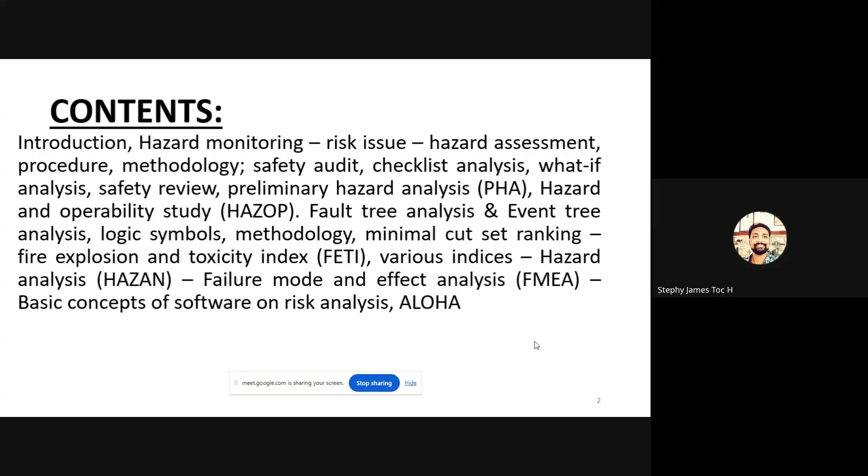Before going in detail, what is the general idea? What is hazard? As you all know, according to International Labour Organization statistics, around 3 lakh 40,000 people are affected by accidents every year in this world.

What are the various types of industries causing accidents, and what are the various other types of accidents which cause fatality to people? Surprisingly, industrial accidents are not killing the most people. It is actually road accidents. If you take the statistics in India, around 1.5 lakh people are dying in India every year on average. The second place is United States, around 36,000 to 40,000 people dying every year in road accidents. If we come to industrial accidents, according to ILO, road accidents are higher and industrial accidents are lesser.

So anyhow, what is the reason for these accidents, what is the cause, or how can we reduce accidents? We have to understand terminologies like hazard, risk, unsafe act, unsafe condition, dangerous occurrence, and so on. What do you mean by hazard? Hazard is generally considered as something that has a potential to cause harm. That may be unsafe acts, unsafe conditions, a situation, or a combination of these things that has a potential to cause harm is called hazard. So this is nothing but something having the property or potential to cause damage to people, property, or environment.

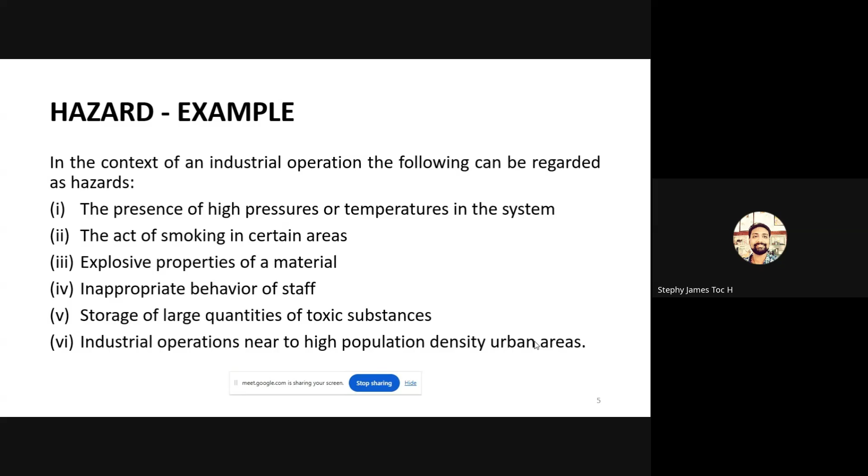So simply, examples of hazard may be the presence of high pressure or temperature in the system, lack of lights or glare, act of smoking, explosive properties of the material, or human error - that is overconfidence, inappropriate behavior of staff, storage of large quantities of toxic substances, rotating machineries without guarding, industrial operations near high population density urban areas.

So we can have hazard classifications like physical hazard. What do you mean by physical hazard? Anybody? Let it be more interactive - I can ask some questions and we can interact, I can get your knowledge also. Physical hazard is nothing but pressure, light, noise, vibration, extreme temperature, and so on. Can anybody say an example of sources which produce high noise? Anybody in industry - what are the equipments which produce high noises in industry, or what are the places where high noise will be there in industry? Anybody?

Anybody can answer? Otherwise it will be only a one-way communication. We try to break the limitations of online sessions by interacting with everybody. No problem if anything goes wrong. Can anybody respond?

Srijit PS, can you respond? Good evening, sir. During the working of fabrication units, yeah, of course, like yes, correct.

Cutting operations, knurling or grinding, extreme noise will be there. During fabrication all these activities are done. Yes, correct only, sir. Anybody else?

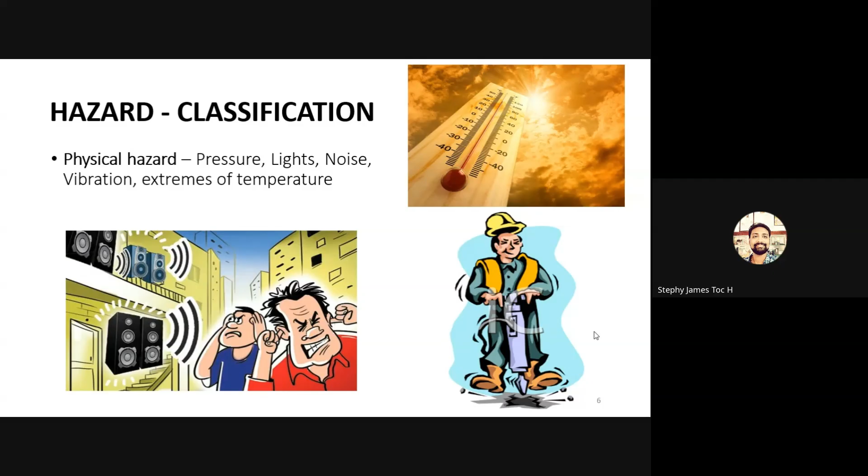This is physical hazard. And chemical hazard - this is very important. Anybody from chemical engineering background can say the major hazard of an industry comes under chemical.

In industrial hazard, the major hazard is fire, explosion, and toxic gas release. If you take an industrial perspective, this is actually a manufacturing and industrial application ATAL FDP. So mainly, if you consider an industry like a refinery or any manufacturing industry, the major hazard is fire, explosion, and toxic gas release.

These come under chemical hazard. So can anybody say what is the major area where fire hazard probability is there? Anybody? Nitin John, can you tell me?

Sorry, can you please repeat the question? Where are the probability of fire in an industry - fire hazard - in which industry has fire hazard? Some petrochemical industry can have.

Absolutely, you are right - refineries. Why does refinery have more hazard? Can you explain? Because refinery - petroleum products are most likely to have fire.

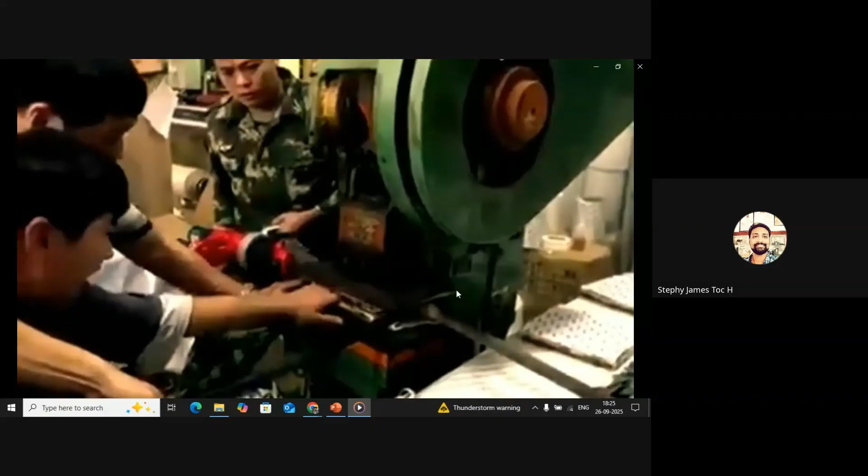This is actually a mechanical hazard. And also you can see here, this is a rotating machine. A lady here, you can see a rotating machine without a guarding. See, this is what happens. Immediately somebody saw that and switched it off. You see this is actually very dangerous.

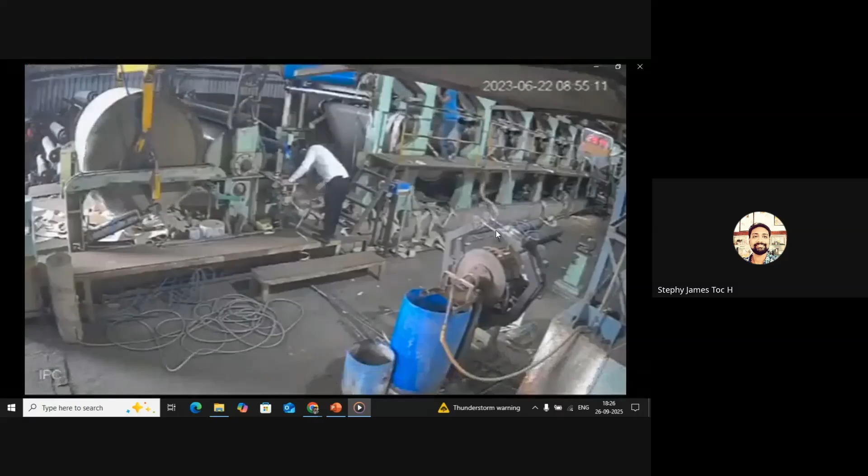That white color shirt boy is just closely watching. He's just putting some paper or something into the roller, very unsafely. And he goes inside, see, he just goes inside the roller. He got crushed into the roller. So these are all mechanical hazards.

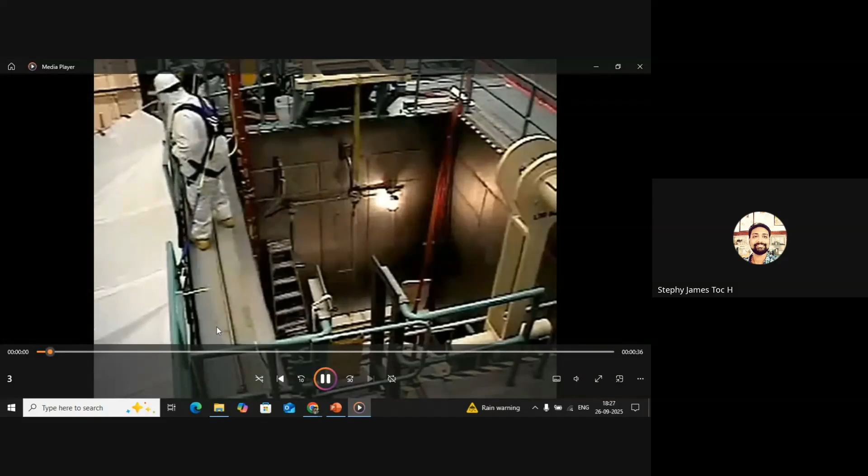And you see this video, he is wearing the harness here. This is the harness, and he's hooked the harness here. If suppose he's slipping from this height, because he has hooked the harness here, what will happen? Suppose he is slipping from this platform. Yeah, he is slipping, yes, he slipped. Now, because of this hook, he has hooked this harness to the lifeline in this area, and that is why he survived. These are all mechanical hazards.

I'll show some more videos in between. So this is about the mechanical hazard: scraping, impacts, contact, entanglement, falling, crushing, all these things come under mechanical hazard. Next, electrical hazard. Somebody want to see the electrical hazard?

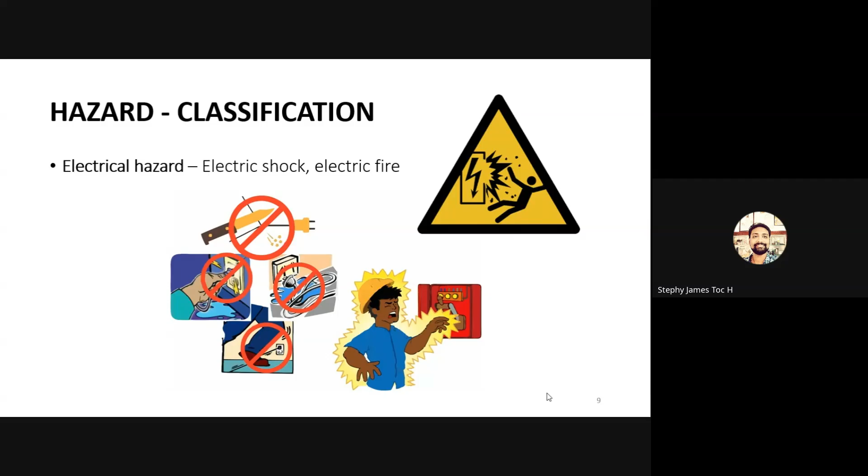Biological hazard, everybody knows about COVID, virus, bacteria, dengue fever, effluent water problems, food handling, and personal hygiene.

Ergonomic hazard - this is actually because of improperly designed tools, poor planned work area layout. So if you are doing repeated motion, sometimes you will be having neck pain, leg pain, body pain, back pain, hand arm vibration, musculoskeletal disorder, MSD. Mechanical engineers might be knowing about it. MSD, hand arm vibration, everything comes under MSD, or maybe we can say CTD, cumulative trauma disorder. All these are ergonomic disorders.

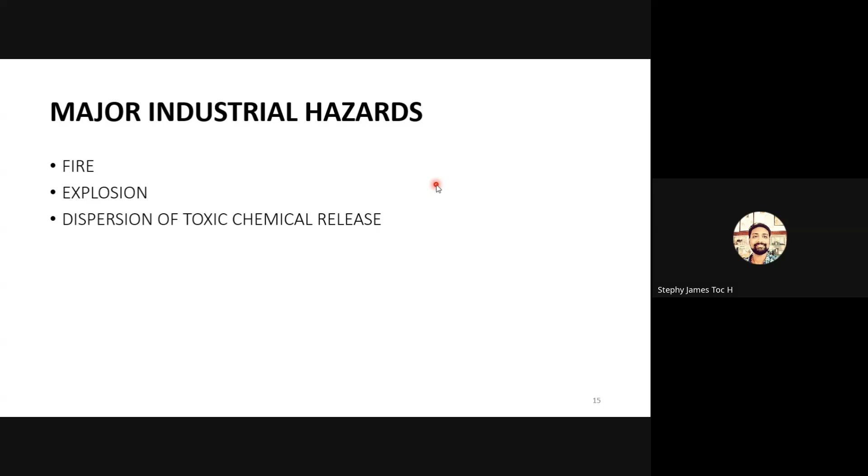So major industrial hazards, as I mentioned, fire, explosion, and toxic leak. These are the major industrial hazards. So fire is the most frequent of hazards, however the consequences are generally less.

Fire hazards - fire can produce toxic fumes also. Recently there was an incident in Kuwait, a building fire, and if you see the casualty of the people, there is no burn at all. Then how did the people die? Because of the smoke - before it comes to CO2, it will produce CO, carbon monoxide. They inhale carbon monoxide, carbon monoxide is also very dangerous. So fire can produce toxic fumes like acrolein, carbon monoxide, and cyanates during a building fire, during building damage. This carbon monoxide, acrolein, and other cyanates it will produce, and people inhale that, and thereby they die, not always because of the heat radiation.

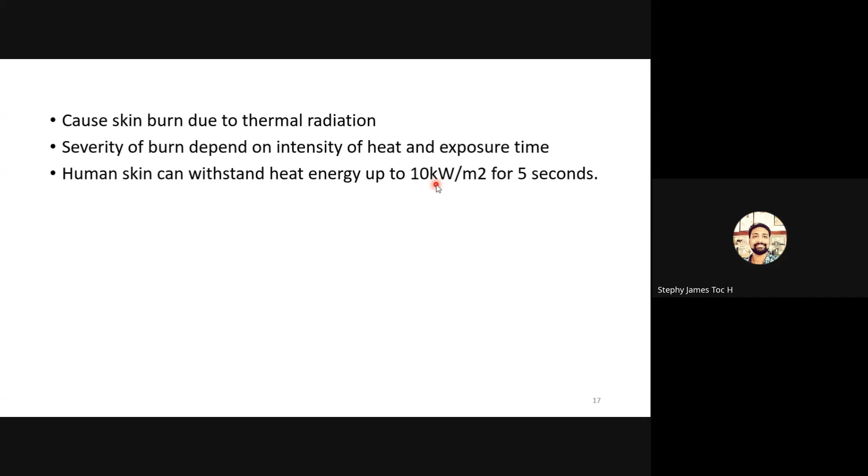Do you understand? So that is one thing. It can also cause skin burn due to thermal radiation, that is another thing. Severity of burn depends upon intensity of heat and exposure time. Human skin can withstand heat up to 10 kilowatt per meter square for 5 seconds. More than that, it will damage the epidermis. The skin has various layers - first degree burn, second degree burn, all these things will be there. So if there is more exposure, 50 kilowatt per meter square and all, it can cause third degree burn, second degree burn, like that.

pool fire - actually from a storage tank it comes out, maybe diesel or petrol, it comes out, and it will be covered in the dike. If suppose there is a storage tank, there will be a dike. Dike is nothing but what you can say, a bund.

Dike is provided to protect the industry. If there is a leakage from the storage tank, it should not spread out to various other layouts or facilities. It should be contained in the dike. A dike is just like a barricade made of concrete structure, so the leak will not spread out and there will be no problems with other facilities. That is called pool fire.

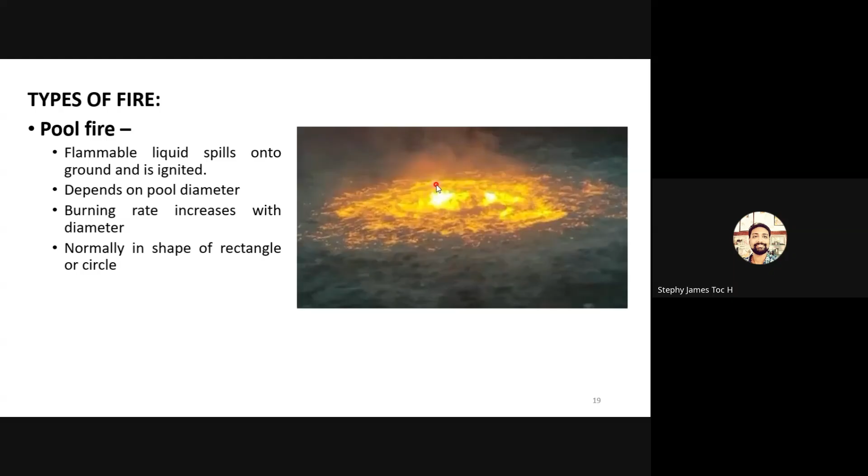And this is BLEVE. Can anybody explain what is BLEVE? Boiling liquid expanding vapor explosion. You might have seen an LPG bottle. What is inside the LPG bottle? What chemical is there inside the LPG bottle?

Anjana? Darshana, Mary. Anybody?

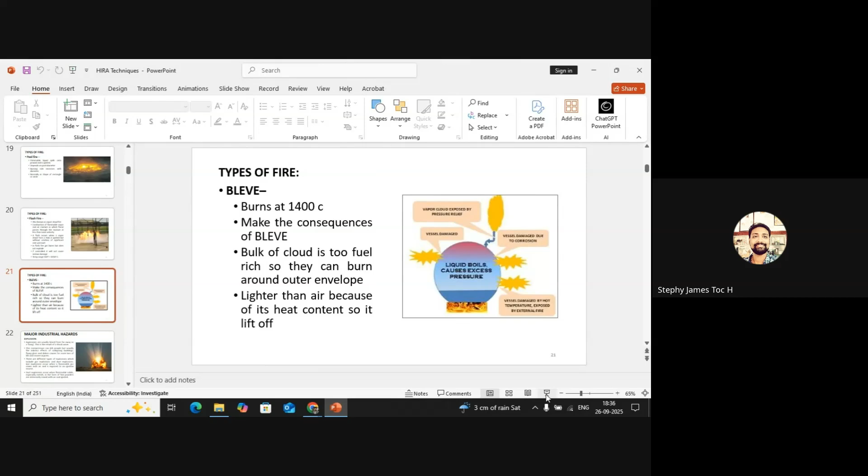So what is the chemical inside the LPG bottle? It is the combination of propane and butane.

Originally, this LPG does not have any odor at all, no pungent smell. Then how does it smell? If from your household domestic application LPG is leaking, you get a smell, a foul smell. Actually, there is a chemical added to it, called ethyl mercaptan. This chemical is added to detect or identify that LPG has been leaked. By adding this chemical, people can easily understand that if it leaks, a foul smell detects it: oh, LPG.

This BLEVE happens, as you all know, LPG is actually liquefied petroleum gas, under pressure it is pressurized and liquefied. If it leaks and catches fire from the nozzle of the regulator, do you believe the fire will go inside the cylinder and it will explode? It is not happening like that. Because of the fire, outside elements like paper, wood or anything like that get fire. So the outside temperature of the LPG cylinder increases, and the liquid inside the LPG starts to boil over or something like that. It becomes gaseous, converting from liquid to gas, and the pressure increases inside the tank, and the tank is designed for a certain pressure.

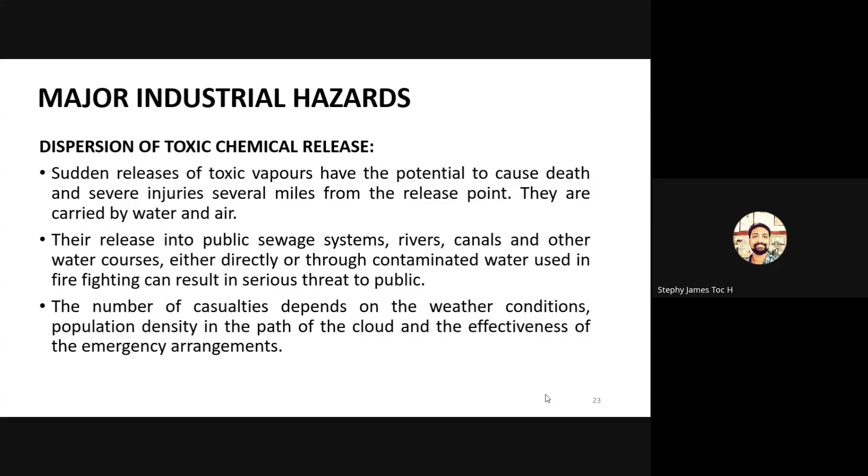So dispersion, what is dispersion? Dispersion is nothing but a sudden release of toxic vapors. They have a potential to cause death and severe injuries. Methyl isocyanate, carbon monoxide, hydrogen sulfide, sulfur dioxide, any types of cyanides, chlorine, ammonia - all these things can leak and people can inhale it.

So the dispersion of toxic gases, this is what I said, the Bhopal tragedy, Union Carbide Limited. Around 42 tons of methyl isocyanate was leaked on that day, and so many people were killed in that disaster. This is considered to be one of the world's largest disasters after Chernobyl.

This accident happened in 1984, and around 42 tons of MIC, 30 metric tons of methyl isocyanate, escaped from the tank to the atmosphere in 45 to 60 minutes.

The MIC tanks were large, refilled beyond recommended levels, with poor maintenance and failure of several safety systems. Actually, there was cost cutting - cost cutting done on safety. There was no scrubber system, flare system, bypass tank system, or refrigeration system. There were no qualified and educated trained people. So they cut the cost for everything. And what happened finally? It was an American company.

They made poor decisions, and Indian life has to be sacrificed for their carelessness and lack of safety. Our people suffered. So many people were killed in that disaster.

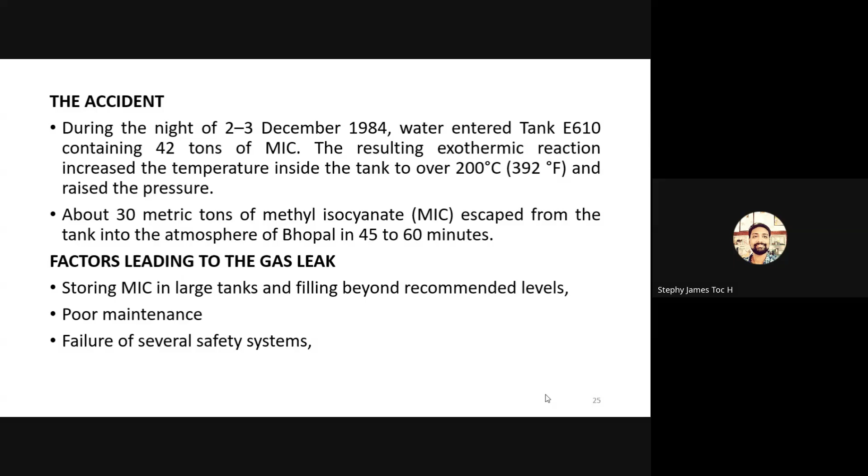So what is risk, nothing more? What do you mean by risk? Risk is actually a combination of probability of occurrence and its severity - probability P and severity of consequence, or probability into severity. Can anybody say what probability means?

Probability is nothing but how frequently an accident is happening - that is called probability. And what is severity? Severity is nothing but what is the consequence of that. So the multiplication of these two things, probability and severity, gives the risk.

And what is the consequence? A small cut, small injury, then first degree burn, second degree burn, one person died, 2% died, 10% died, 100 people died. So you can see how the consequence increases.

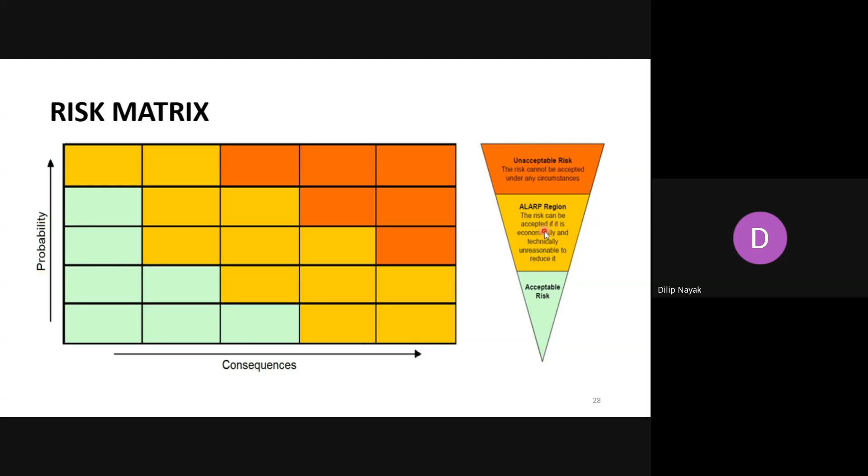The ALARP region is nothing but as low as reasonably practicable, that is the tolerable region. So high risk means intolerable, then tolerable, then acceptable. These are the three risk ranks.

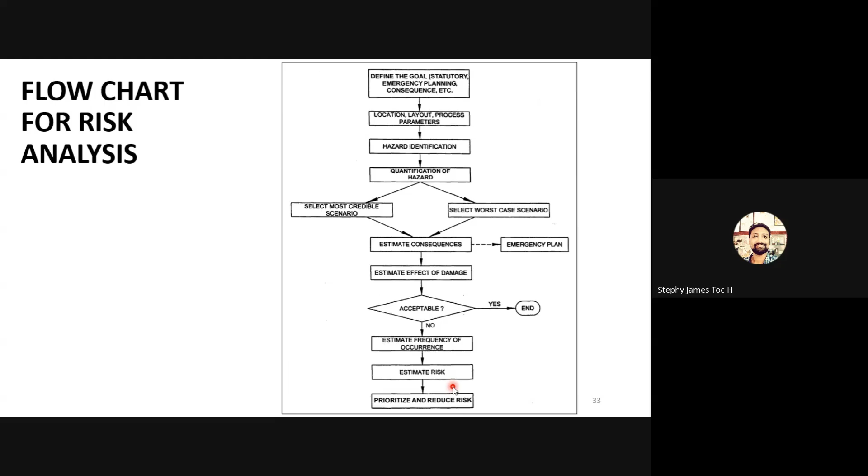Now this is the flowchart for risk analysis. Here the main thing we do is define the goal, then location, layout and all that, hazard identification, quantification of hazard, select the most credible scenario, select the worst case scenario, estimate the consequence, estimate the effect of damage, then decide whether it is acceptable or not. If it is not acceptable, then estimate the frequency of occurrence, estimate the risk, and prioritize and reduce the risk.

We have to prioritize the risk. There are a lot of incidents happening in industry, and many hazard identification tools have prioritization techniques too. If you take Chandrayaan 3 rockets and space missions, there are 10,000 or more components. So which component's failure collapses the entire mission? That component has to be given the highest priority, and redundancy should be there for it. If that component fails, another component has to take over - so 3 or 4 times redundancy is required, and high reliability is also required.

So the goal of carrying out risk analysis is required as part of statutory requirements, emergency planning, etc. And the quantification of hazards uses indices - methods for hazard identification and quantification.

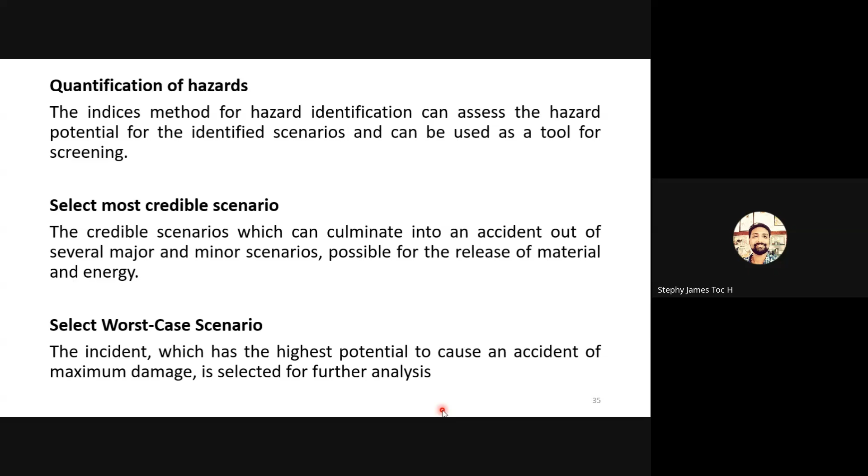Imagine your college classroom, I'll ask a question. Imagine a college classroom. Darshana Mari, I called you twice, are you there? Darshana Mari... Darshana Mari is not there, so let's go to Dilip Naik. Dilip Naik? Yes sir. Are you faculty? Yes sir. Sir, in your college classroom, somebody asks you to assess the fire risk. If the fire risk is high - yes sir - imagine in your classroom the fire risk is high. How can we reduce the fire risk to low or medium?

Sir, we have to keep fire extinguishers. Yes, absolutely, you are right. Fire alarm, fire extinguisher system, we can provide, sprinkler system we can provide, fire hydrant we can provide, fire exits, fire doors has to be provided. So do you have all this system in your classroom? Yes, sir. Then your fire risk is very less. Everything is provided, your college is taking care of you very well.

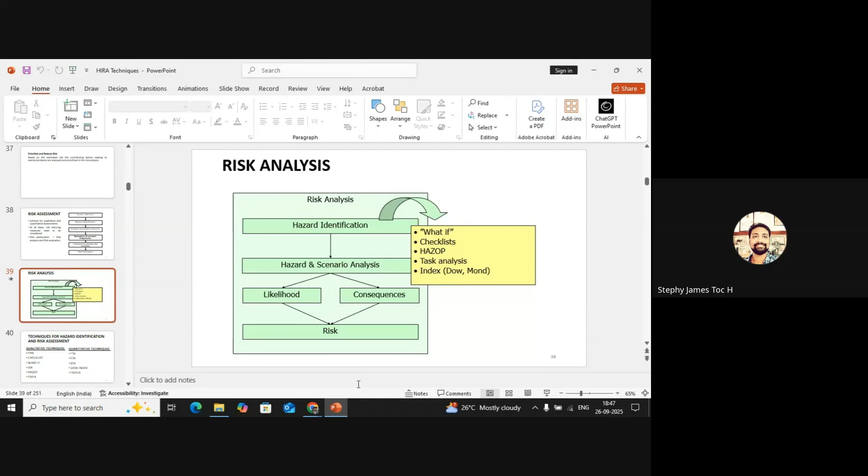But in many institutions or hospitals, there is no sufficient mechanism for reducing the fire risk or hazard control. So there are various techniques used for hazard identification: what-if analysis, checklist, HAZOP, task analysis, Dow index. These are the various techniques.

Generally, we classify hazard identification and risk assessment techniques into two categories: one is qualitative technique, one is quantitative technique. Another one is semi-quantitative technique, that is layer of protection analysis, which is actually a semi-quantitative technique.

So qualitative technique means, as I can simply explain, if I ask somebody how is the rain, you can give a qualitative or a quantitative answer.

Prilly VF. Prilly VF not available. 71 people are here, but most of the people are not available. Gopika NE. Okay, so the effectiveness of the FDP may not be that much good, I think, because they just opened it and went somewhere else. Jishnu K. Jito George. Okay, anyhow, no need to ask questions.

So if somebody asks you a question like this, how is the rain, the qualitative answer is: the rain is very good, heavy rain, low rain, medium rain, or there is no sufficient rain, very less rain, poor rain. These are all qualitative answers.

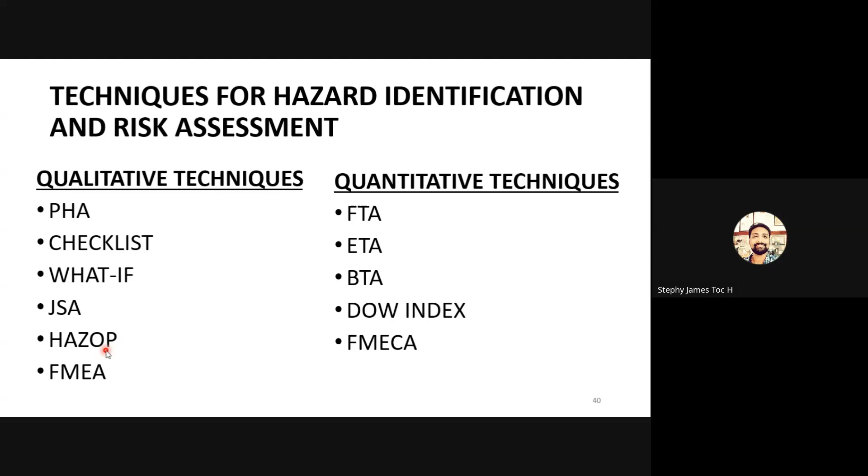So that is about RPN, risk priority number. And PHA - these are the qualitative techniques. PHA means preliminary hazard analysis, checklist, JSA, HAZOP means hazard and operability study, and FMEA, failure mode and effects analysis. So a scenario is a sequence of events which causes hazard to result in accident.

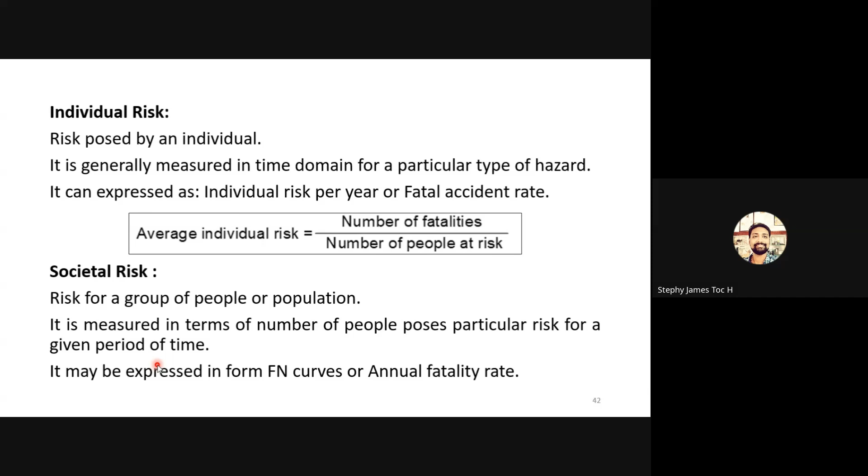Risk analysis is a quantitative estimate of risk using engineering evaluation. It involves estimation of hazard and probability of occurrence. This is the formula used for finding the individual risk: number of fatality divided by number of people at risk. So you can find the individual risk, and it can be measured using a technique called risk contour. Societal risk can be mapped using a graph called the FN curve.

And this, as I already mentioned, is ALARP - as low as reasonably practicable, which describes the level to which we expect to see workplace risk control. As I mentioned in the ALARP triangle, you can see 3 regions: the top region is high risk, that is intolerable, then tolerable, then acceptable. These are the 3 regions. You can calculate the risk, and if it comes under the intolerable or unacceptable region, what do you have to do? We have to add more safety systems to this.

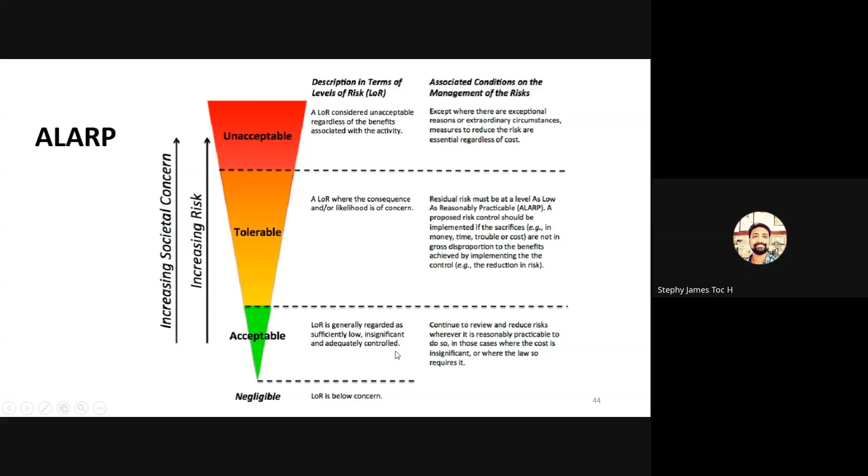Dilip Naik. Can somebody mute Dilip Naik.

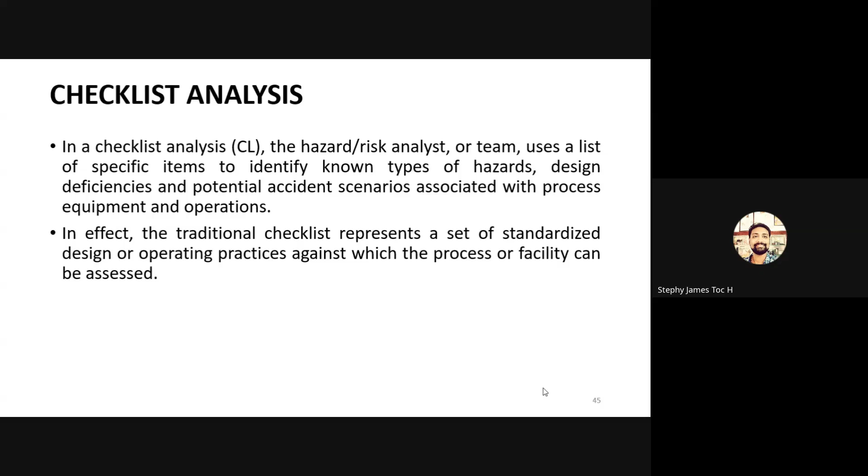The first method is the checklist method used for doing safety inspection. The checklist comes from IS 14489, which is the code of practice for safety audit. The checklist will have around 400-500 questions, such as whether safety systems and checkpoints exist, whether there's a safety policy, sufficient fire extinguishers, sufficient sprinkler systems, electrical records, licenses, and so on. Lots of questionnaires will be there. This is the checklist method of conducting safety audit.

Necessary additional columns can be added based on requirement. Traditional checklists generate a list of responses to standard checklist questions, and more general checklists may be produced. Various types of checklists exist - for electrical safety audit we prepare a separate checklist, and similarly for mechanical, chemical, or environmental audits like ETP, all different types of checklists.

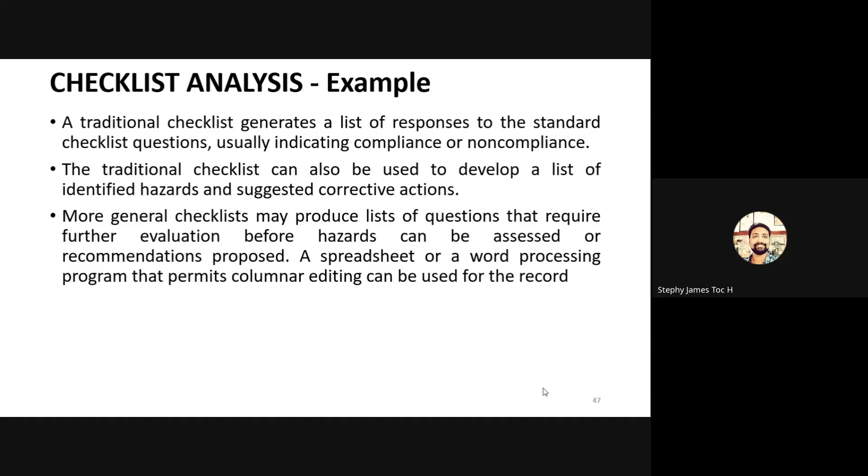The next technique is what-if analysis. This is a very simple technique - we just ask questions and get answers. For example: if suppose there is a fire accident, what if? If suppose valve A is open instead of valve B, what if? If suppose there's a substitution of wrong material into the reactor, what if? We keep asking what if and find out the answer.

So we propose a what-if question and identify the scenario, consequences, and recommendations. This is the table we use - let me explain with an example of what-if analysis.

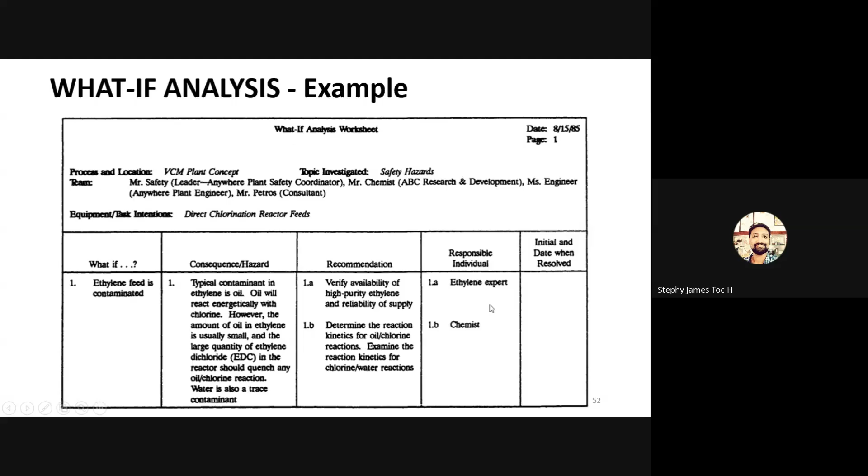Ethylene feed is contaminated - what if? What is the consequence? What is the recommendation? Who is responsible? This is a worksheet for what-if analysis for a particular plant.

Another example: Cl2 feed, chlorine feed is contaminated. What if? What is the cause? What is the consequence? What is the recommendation for that?

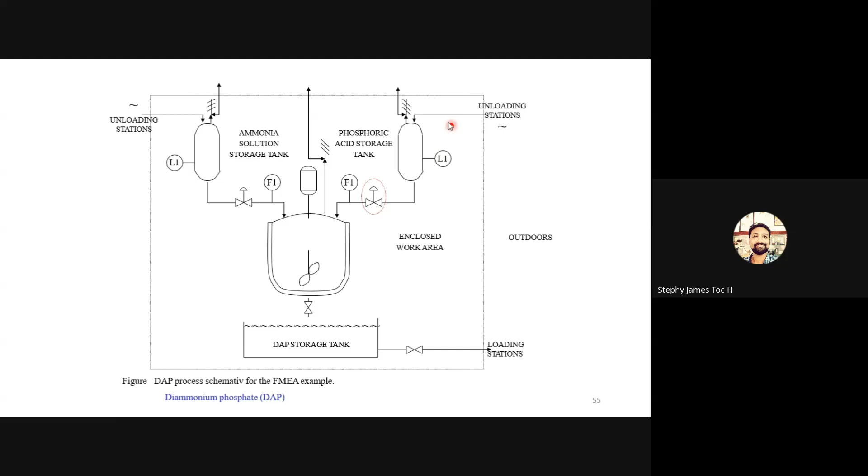Here you can apply what-if analysis. The what-if questions are: what if the wrong product is delivered instead of H3PO4? If suppose some other material is fed to the reactor instead of H3PO4, what if? What if H3PO4 is at the wrong concentration? The stoichiometric concentration has to be maintained, otherwise instead of DAP, some other product or out-of-specification product will result. What if H3PO4 is contaminated?

What if valve B is closed? What if valve C is closed? What if vessel agitation stops? Like this, we keep asking questions and finding answers. This is a simple way of doing what-if analysis.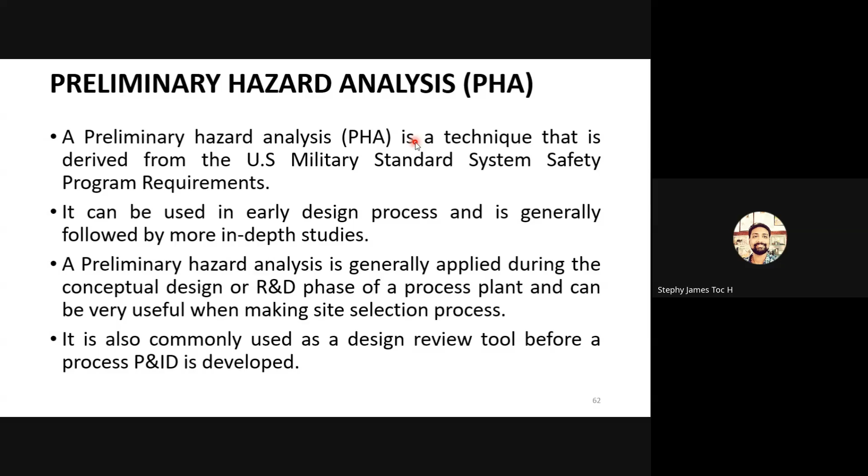Safety review is not much important, so I'm skipping this. The next one is preliminary hazard analysis, which is a little more important. Preliminary hazard analysis was actually invented by the US military to identify various hazards in the early design process or during the P&ID - meaning the pipeline instrumentation diagram or process instrumentation diagram.

During the design phase itself, we can find out various problems like facility characteristics, plant equipment, facility layout, operating environments, operational activities, and all. Now let's move to this.

This is actually PHA. The hazard can be classified into category 1, 2, 3, 4. Hazard category 1 means negligible, 2 means marginal, 3 means critical, 4 means catastrophic. This is actually documenting the risk.

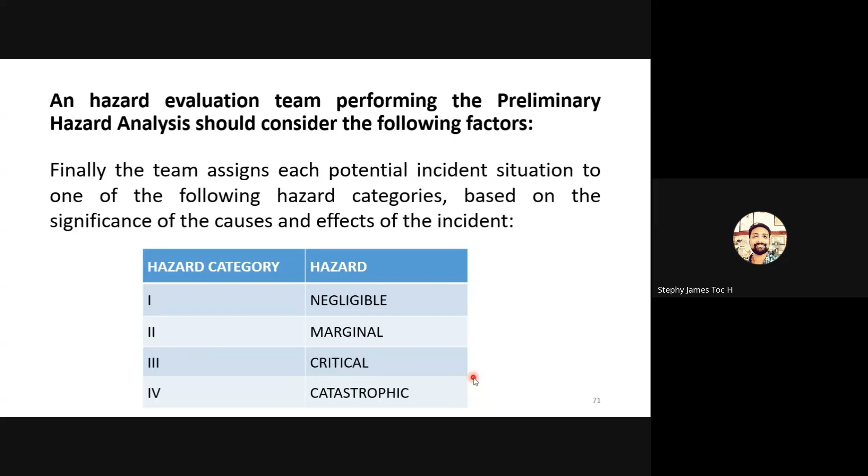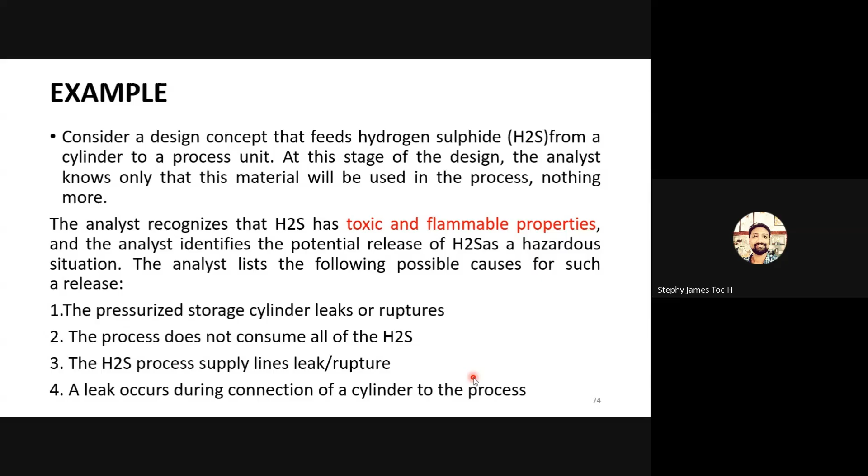And the corrective action - this is a simple example of PHA. Here, what is actually happening? The analysts recognize that H2S has toxic and flammable properties, and the analysts identify the potential release of H2S as a hazardous situation. The analyst lists the following possible causes for such release.

Consider a process that stores alternative less toxic material that can generate H2S as needed. Hydrogen sulfide, as you know, if it leaks, what will happen? That is the thing we have. So PHA deals with a large inventory of highly toxic hazardous material.

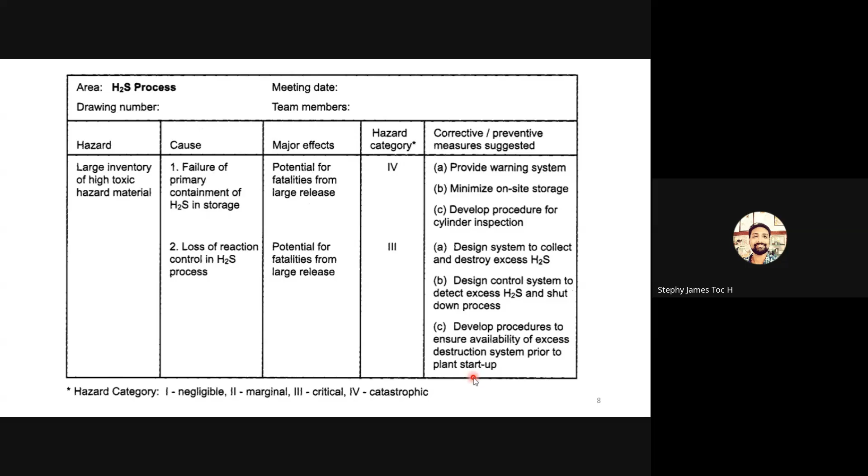What is the cause? Failure of primary containment. If the failure of primary containment happens, then there's a potential for fatalities from large release - that hazard category is 4. And loss of reaction control in the H2S process, the potential for fatalities from large release, that is hazard category 3.

The next important technique is - sometimes I am skipping, because this presentation has 200 more slides. This is meant for a 3-hour presentation, but your time is only 1.5 hours, so some slides I will skip. Only the important things I will explain.

So HAZOP is actually a very important technique. Any chemical engineers here might be knowing about HAZOP. Is HAZOP applicable to the construction industry? Can we apply HAZOP to construction?

Anybody? Joyce, Helen, Satya - Joyce, Helen, Satya is not responding. Mahadevan is there. Mini can respond, Mini is there. Mini, oh.

Okay, nobody is responding. So hazard and operability study can only be applicable to process industries, because HAZOP uses guide words and is applicable to certain parameters - parameters like pressure, temperature, flow, level, viscosity, all these things. So this is actually developed to identify and evaluate safety hazards in process plants, chemical industries, process industries, refineries - not suitable for construction industry.

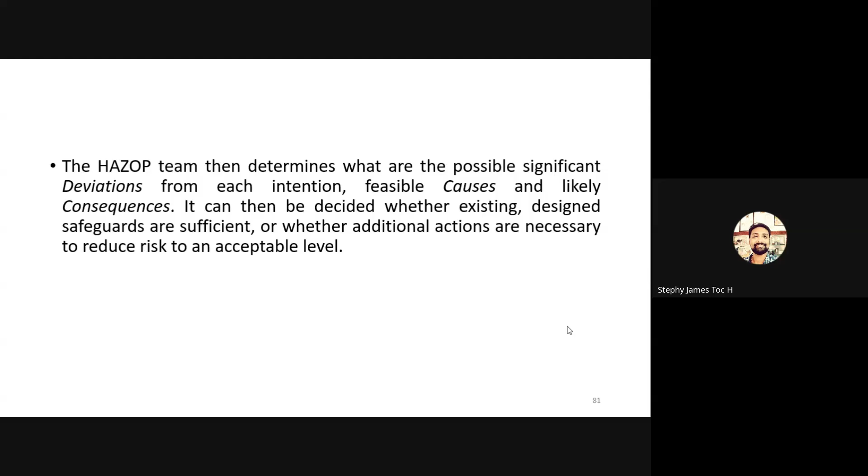And we list out the causes for the deviation, and the consequences for these problems, and we recommend various recommendations to address the problem. This is applicable to existing plants, and also applicable to new plants.

So this is our piping and instrumentation diagram. Before understanding the P&ID diagram, you have to understand the symbols. So now we can see a heat exchanger here - this is converted to P&ID, it will look like this. Just look carefully - now I am going to convert this into a P&ID diagram.

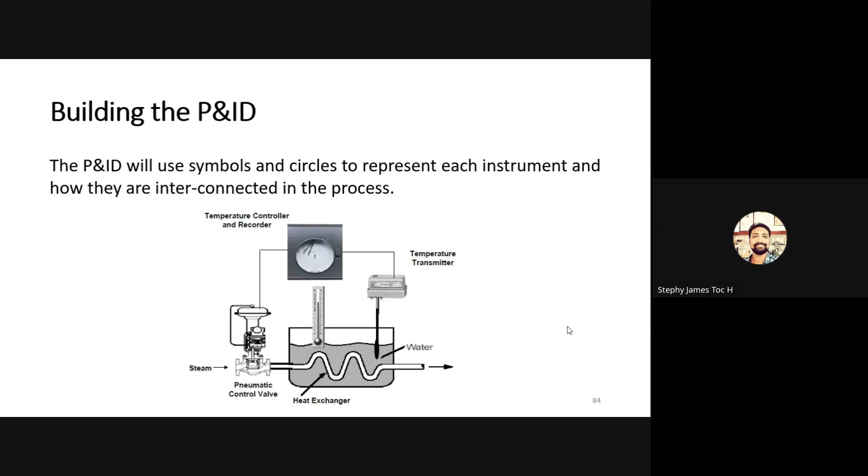It will be like - what is TRC? Anybody? TRC - any chemical engineers? TRC is nothing but temperature recorder and controller. TT - temperature transmitter. TI - temperature indicator. FCV - flow control valve. Look at the first letter.

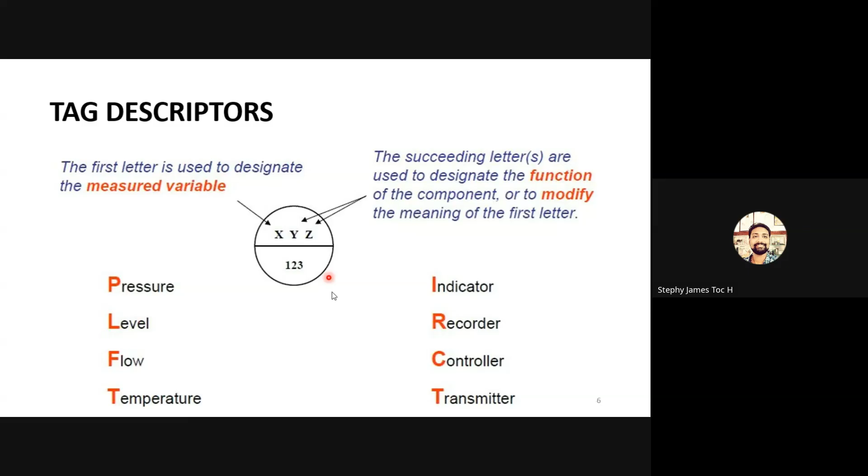How do you understand the P&ID diagram? Simple logic of understanding it: the first letter of the P&ID indicates the measured variable - pressure, temperature, flow, something like that. The next two letters represent the function - recording, indicating, controlling. So like this you can see temperature recording controller, temperature transmitter, temperature indicator - the first letter is the variable, temperature.

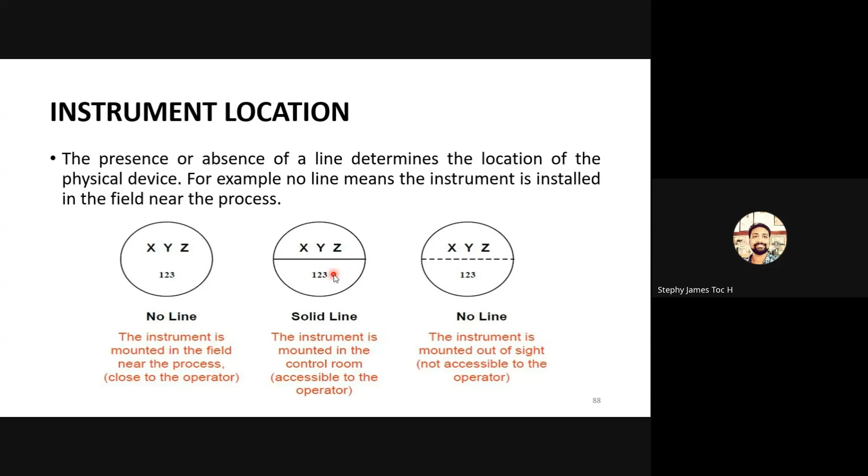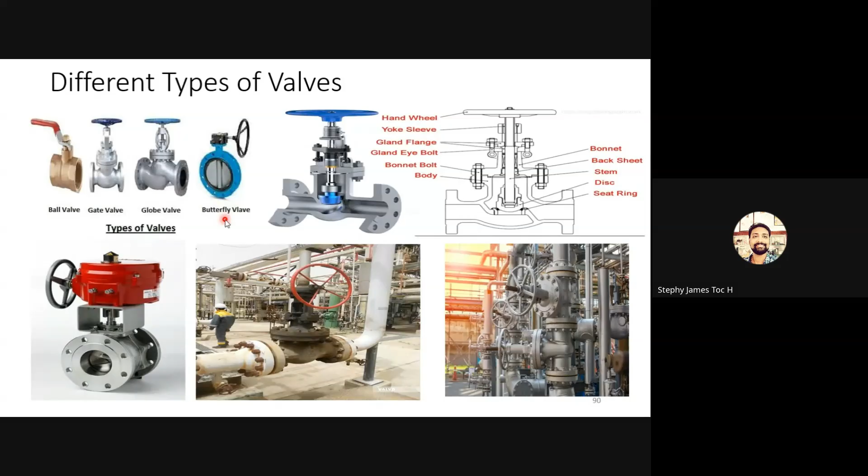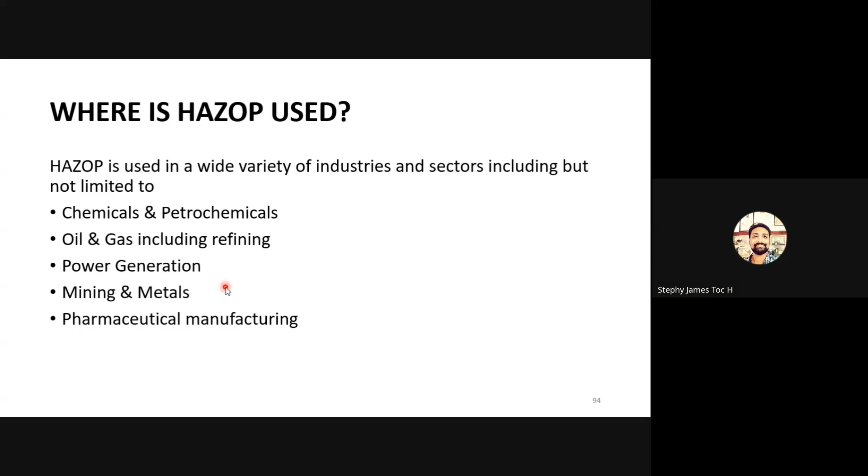So where is HAZOP used? HAZOP can be used in chemical, petrochemical industries, oil and gas, power generation, mining, pharmaceutical manufacturing. Wherever process is there, chemical process is there, all the places we can use HAZOP.

No means what? No design intention is achieved - no flow. More means quantitative increase, higher temperature. Less means quantitative decrease, lower temperature.

As well as means additional activity - other valves close at the same time as the dedicated valve. Part of means only some of the design intention is achieved, only part of the system is shut down.

Reverse means logical opposite of the design intention - that is backflow when the system is shut down. Other than means complete substitution of the activity, like liquids in a gas pipeline, or instead of ammonia, chlorine will come.

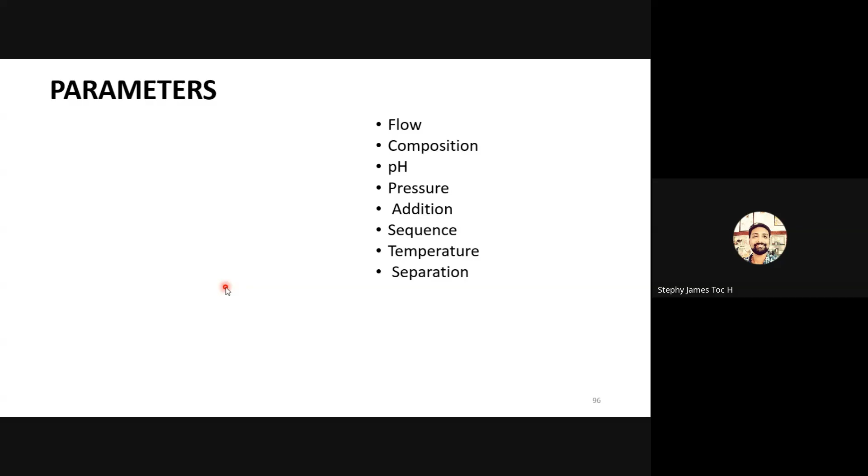This is the complete substitution. And the parameters are the various parameters like flow, composition, pH, pressure, sequence, temperature, signal, mixing, communication, reaction, time, stirring, phase, operate, transfer - all these are the various parameters. A parameter is an aspect of the process that describes it physically and chemically in terms of what is happening.

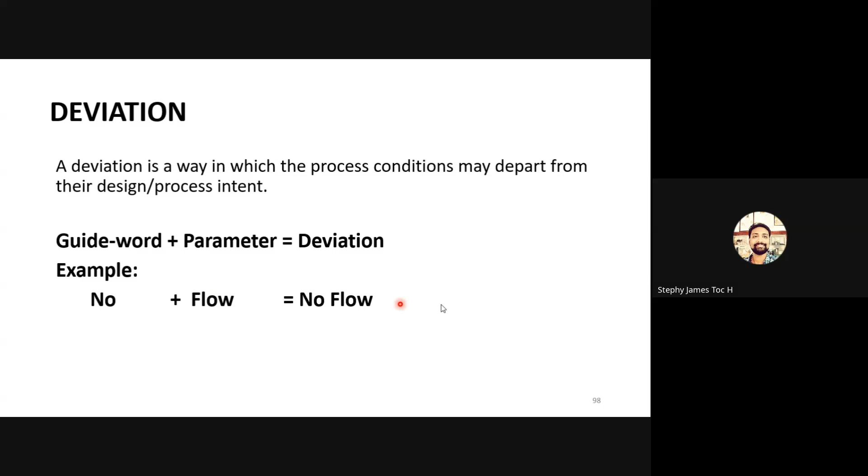So flow plus no equals no flow. More plus temperature equals more temperature. Less plus pressure equals less pressure. Like that, we get the deviation. Now, cause and consequence.

This example shows here we can have a material A and material B, and it will produce material C. The condition is that material B's concentration should never exceed that of material A. If it happens, there is a chance of explosion. We can take parameters like flow, temperature, pressure - anything you can take.

Now they have taken the parameter called flow, and they have taken the guide word no, more, or less. They have taken a node like this - this is the node they have taken, the first A node.

In this node, suppose there is no flow. What is the cause? Supply tank empty, pumps fail - pumps could have mechanical or electrical failure, pump switched off, pipeline fractured. All this may be the reason for that.

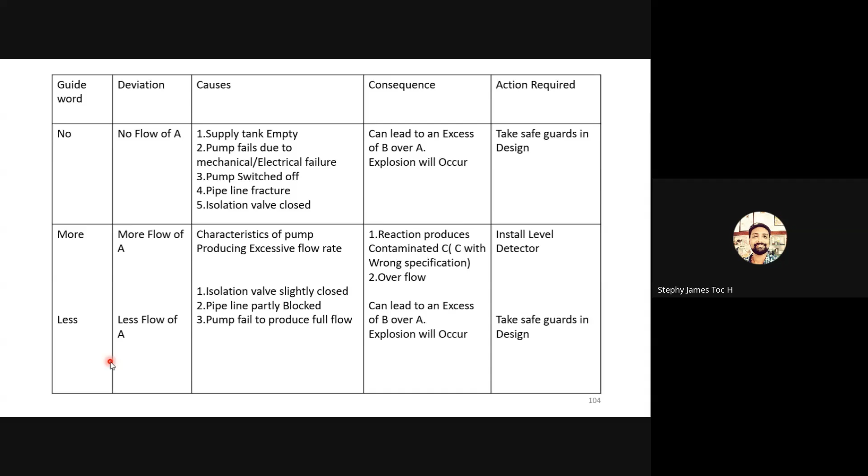And we can do a risk matrix on our HAZOP. If we add a risk matrix to the HAZOP, it will become quantitative. Otherwise, it's just a qualitative technique. And so for example also there - I'm skipping because of no time.

Next topic is fault tree analysis. Does anybody have any idea about fault tree analysis? What is fault tree analysis?

Fault tree analysis is mainly used for finding the cause. Suppose fault tree analysis can be used if you got an accident - there is a fire, electrical fire, leakage, the fan is not rotating, the motor is not working, the TV is not working. For any equipment malfunction, we can do fault tree analysis.

If any incident or accident happens, we can do fault tree analysis. It is also called cause-effect analysis or cause and effect diagram. So we are finding the exact cause, and in the end it becomes a complex system.

There are various causes for an incident to happen. For the combinations of various causes, we find out which combination of causes leads to the top event, the root cause, by using the combination which leads to the highest probability of creating a cause.

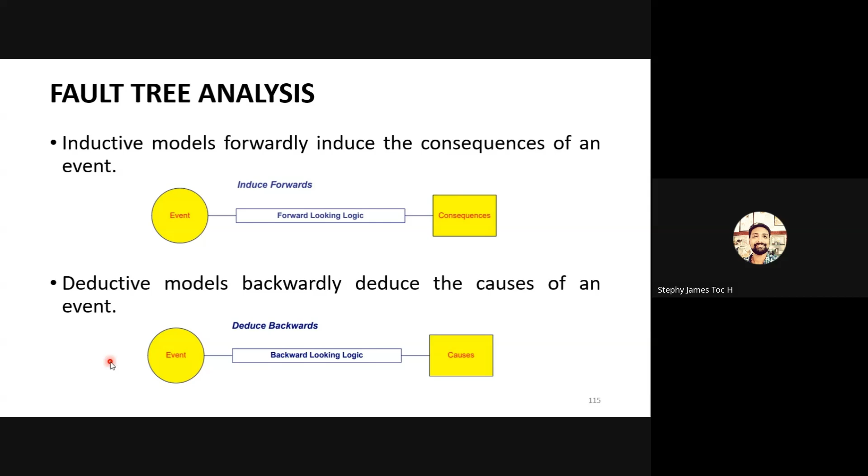This is nothing but the fault tree, an inductive method. Inductive models forward induce the consequences of events, while deductive models backward deduce the cause of the event. Actually, fault tree analysis is a deductive method used to find the reason for an event. But the inductive method, event tree analysis, finds the various outcomes and their frequency. We'll see fault tree analysis in detail.

To do fault tree analysis, we need certain logic diagrams. A logic diagram uses logic symbols called AND gate, OR gate, intermediate gate, or top event. All these symbols are used to develop a fault tree analysis.

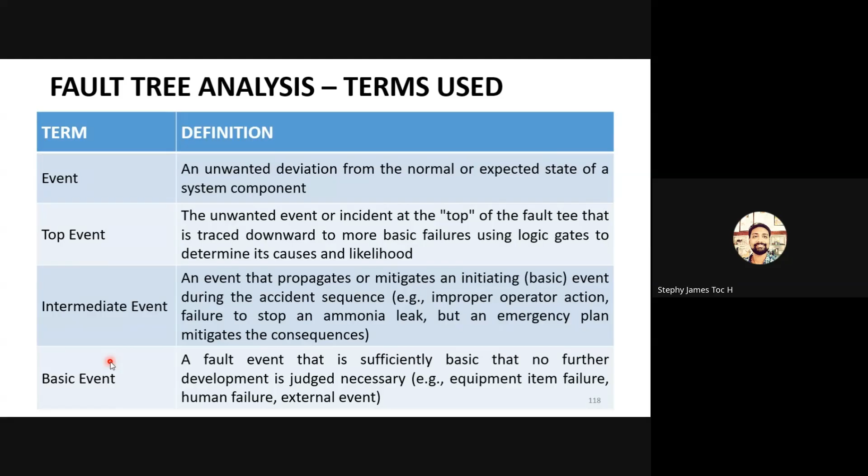These are the fault tree analysis terms used: event, top event, intermediate event, basic event, undeveloped event, logic gate, Boolean algebra, and so on.

The fault tree explicitly shows all the different relationships necessary to result in the top event. In constructing the fault tree, a thorough understanding is obtained of the logic and basic causes leading to the top event. The fault tree is a tangible record of the systematic analysis of the logic and basic causes leading to the top event.

So why do we do fault tree analysis? To exhaustively identify the cause of failure, to identify weaknesses in a system, to assess a proposed design for its reliability, to identify the effects of human errors, and to prioritize the contributors, among other things.

This is how the fault tree looks like. This is the top event. Can anybody tell what these gates are? This is an AND gate and this is an OR gate.

When do we use an AND gate, and when do we use an OR gate? That is another question. Anybody?

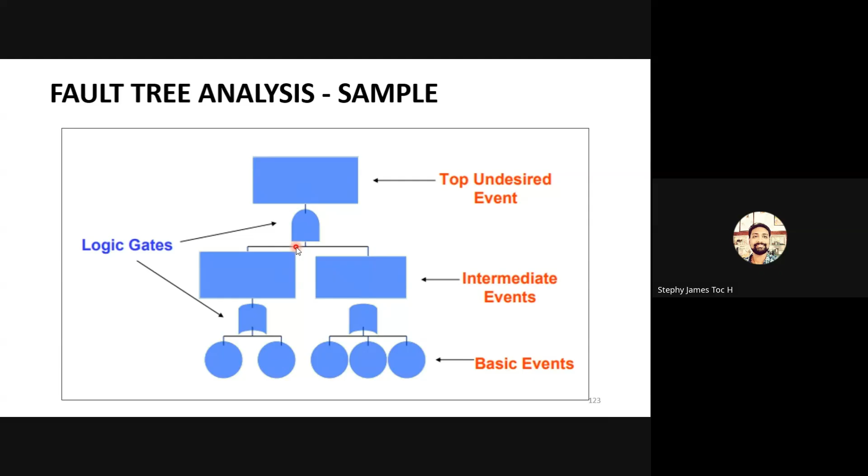You know the two types of OR gate and AND gate. There are various symbols of gates. Okay, let's keep that aside and directly come to the example.

That is about the fault tree. The minimal cut set concept, I am skipping, as that is not required for you.

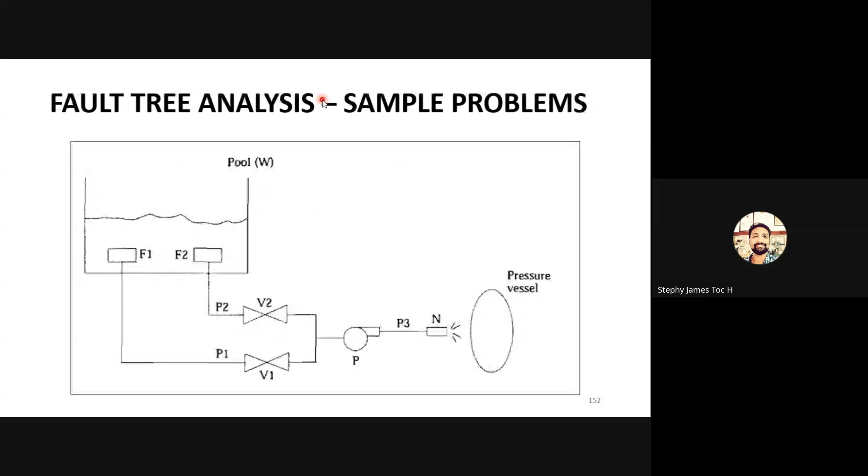Now let's come to the event tree. As I mentioned, the event tree is nothing but a cause-effect analysis. Suppose a leakage happened. The fault tree is actually used to find out what is the cause of that leakage. You understand? The fault tree is used to find out what is the cause.

Event tree is used to find out what is the outcome. So leak happened, LPG leak. Fault tree is used to find out what is the cause for the LPG leak.

Event tree is used to find out what are the effects, whether the LPG leak results in a jet fire, whether it results in a pool fire, or BLEVE. So the different outcomes we find out by using this event tree.

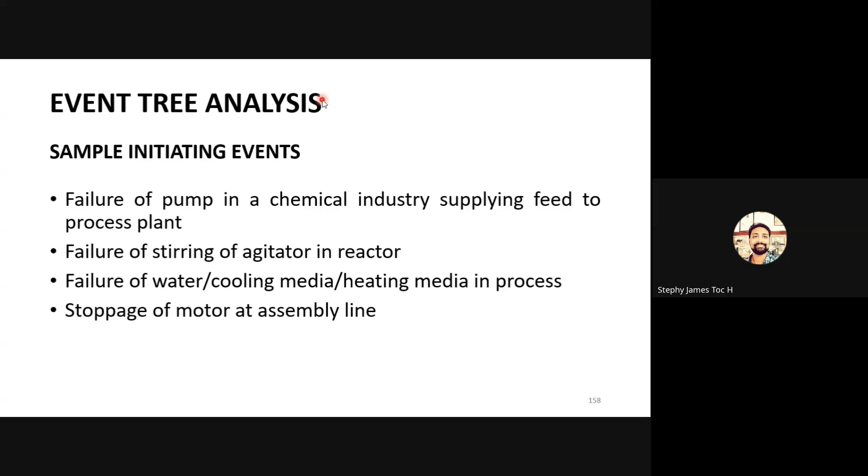Sample initiating events: failure of pump in a chemical industry supplying feed to the process plant, failure of stirring of agitator, failure of water cooling, stoppage of motor - anything can be taken as initiating events. We identify the starting event of interest, then identify the safeguard designated to respond to the starting event, then construct the event tree.

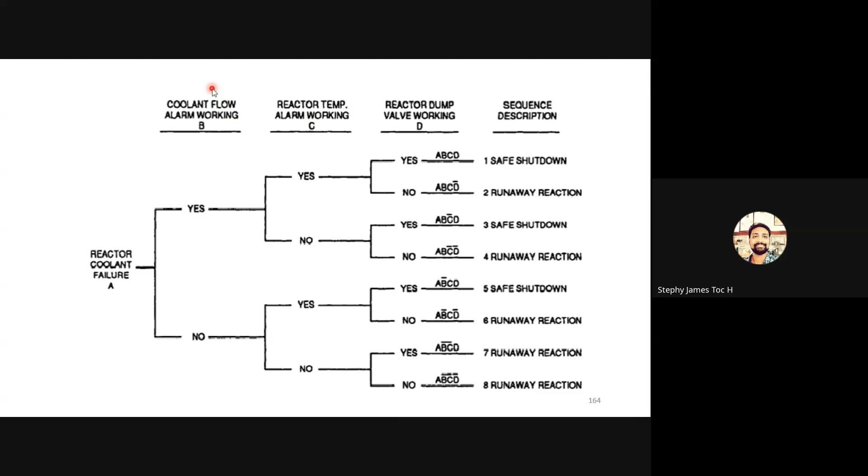This is how it looks like. These are all the safety functions, our safety functions, and we find out the various outcomes.

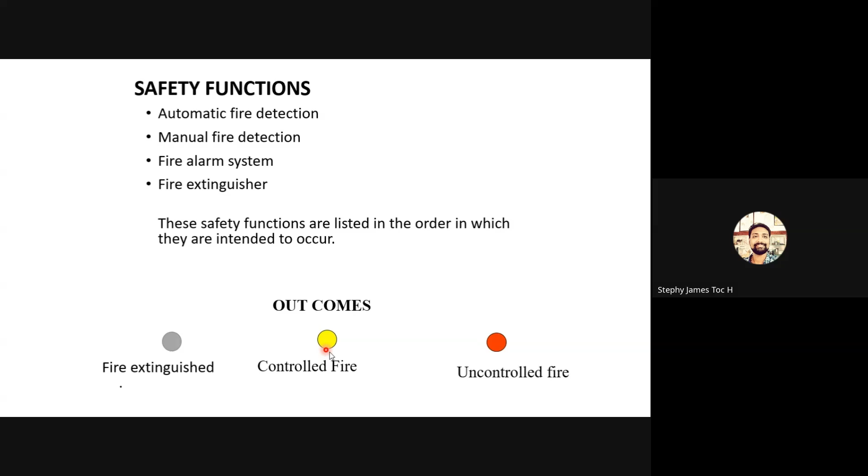Now I'll show you an example here. These are the various functions: automatic fire detection, manual fire detection, fire alarm, fire extinguisher - these are the safety functions. Gray color means fire extinguished, yellow means controlled fire, red means uncontrolled fire. Initiating event is fire ignition.

There is a fire. So what will happen? Automatic detection activated, then fire alarm activated, then it extinguishes the fire, and this is gray, meaning fire is extinguished. If automatic alarm failed, what happens?

There is uncontrolled fire. If automatic fire alarm succeeds but fire alarm failed, that is also red, or if fire extinguisher failed also. Like this, the different outcomes we can create. If automatic alarm fails, manual alarm fails, fire alarm fails, fire extinguisher fails - these are the various different outcomes using this event tree.

So this is the event tree method. You can add probability here. The probability you can see here - this is 0.12. If suppose 0.12, you know how this 0.88 you got?

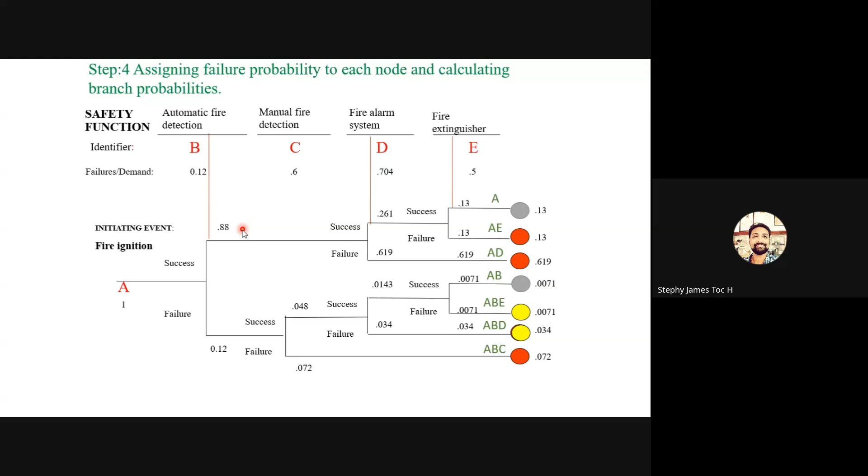This is how we can calculate the various probability. Next technique is an example - here also the same event tree examples are there. Fire and explosion toxicity index.

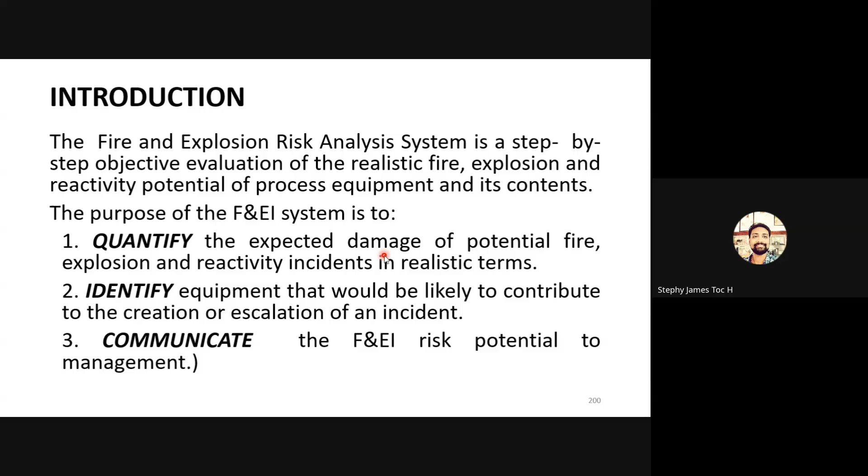This is actually a quantitative technique, fire explosion and toxicity index. Here we are finding out how the fire and explosion chance is. Here basically we are using a formula. I'll show you the formula directly. Yes, this is the formula.

Fire explosion index is equal to MF. MF is nothing but material factor into 1 plus GPH total. GPH means general process hazard, into 1 plus SPH, that is special process hazard. This comes in various ranges - we calculate whether it is high, low, or medium, and we get the exact risk number. That is fire - we'll say it is fire, explosion and toxicity.

Fire index is only this F. Toxicity index by using this formula, TH plus TS by 100. And this is the range: if F&EI index is 1 to 60, the degree of hazard is light, then 61 to 96 is moderate, 97 to 127 is intermediate.

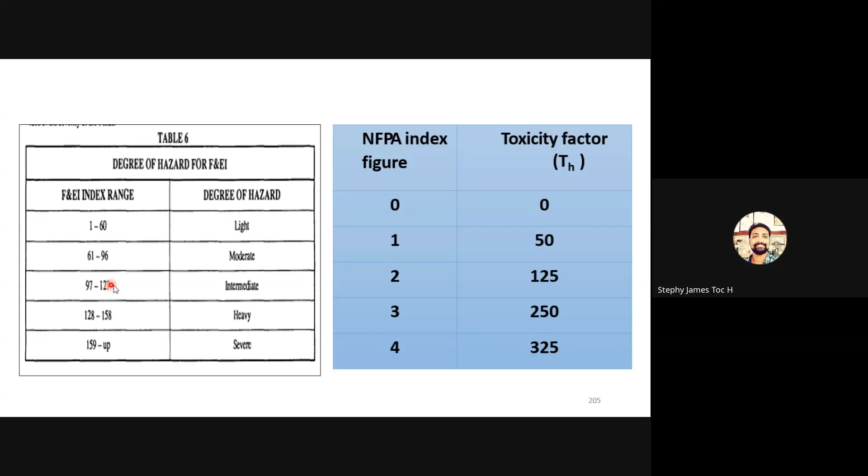Okay, now we come to this, I'm skipping. Failure mode effect and analysis - this is the last one. Okay, 10 more minutes. Failure mode effect and criticality analysis - this is actually a very important technique.

This is mainly used for mechanical and electrical systems, maybe electrical, aerospace industries or space missions, and all we are using. Here we are finding out the various things - I'll just show you.

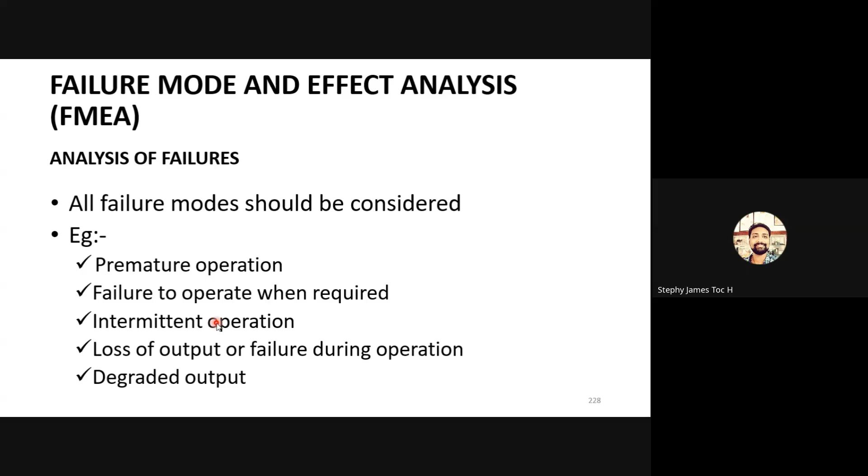Failure analysis: all failure modes should be considered. Example: premature operation, failure to operate when required, intermittent operation, loss of output or failure during operation, degraded output. These are the various failure modes.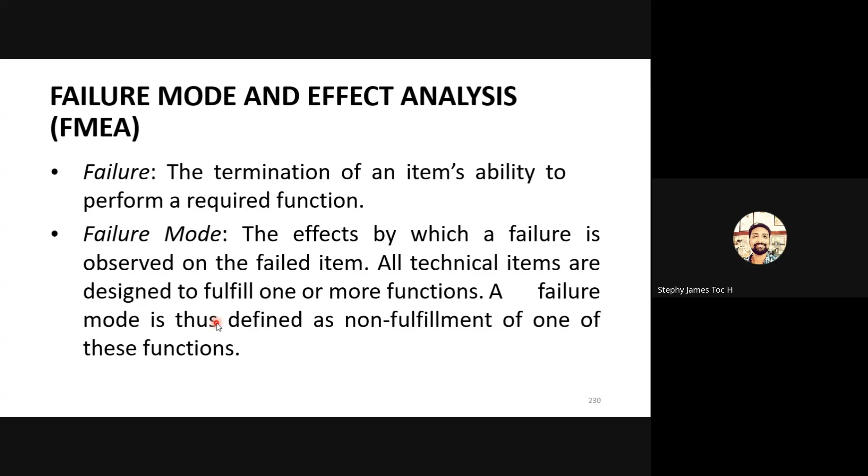So these are the failure mode effect analysis classifications of failures: sudden versus gradual failures, hidden versus evident failures according to the effects, critical, degraded or incipient failures according to severity, catastrophic, critical, marginal or negligible, primary failure, secondary failure, and command fault. This is the classification of failure mode - fail to open on command.

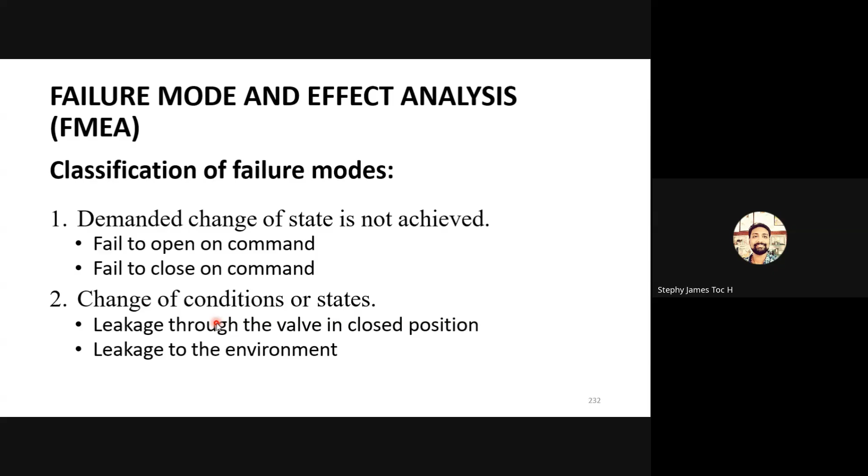Suppose when you give a command to a motor operated valve, we give a command to open the valve, but sometimes it will not open. That's actually a failure mode analysis. So fail to open is a failure mode, fail to close is a failure mode, leakage to the environment is a failure mode. So these are the various failure modes.

Pump normally operating, fails on, transfer off, seal leak, heat exchanger leak or rupture, tube side plug, shell side plug, fouling - all these things are failure mode effects.

So here this is the same example taken from the DAP process, which I already mentioned. So suppose phosphoric acid is in excess of specification, product, NH3 excess, residual NH3 release - both these things are in excess, then out of specification product will be produced. So here a failure mode effect analysis is done.

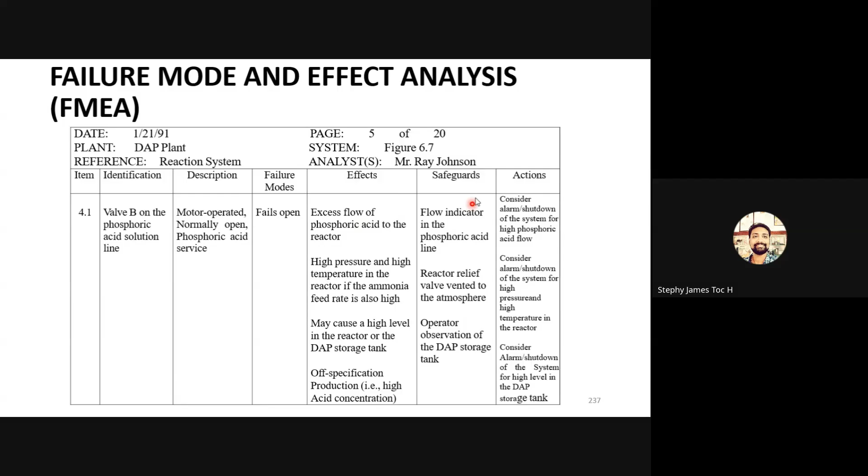You suppose valve B on the phosphoric acid solution line. This is the identification. Description is motor operated valve fails open. Fails open means what happened? If valve B fails open, there's excess flow of phosphoric acid to the reactor - that is the effect. And what are the safeguards attached? This is a simple way of FMEA.

Now, like this, we can continue. Then next is failure mode effect and criticality analysis. What is FMECA?

FMECA is a technique which is an extension of FMEA by including a criticality analysis, which is used to chart the probability of failure modes against the severity of their consequence. The result highlights failure modes with relatively high probability and severity of consequences, allowing remedial effort to be directed where it will produce the greatest value.

The risk priority number, which is the multiplication of O, S, and D, is used for prioritizing the failure modes in FMECA. To use the risk priority number method to assess risk, the analysis team must rate the severity of each failure effect, rate the likelihood, and the RPN is calculated by multiplying severity, occurrence, and degree of non-detection.

I can simply explain: suppose you take severity on a scale of 1 to 10. Severity 1 means very minor damages, minor injury. Severity 10 means 10 people died, 100 people died. So severity is 10 or more.

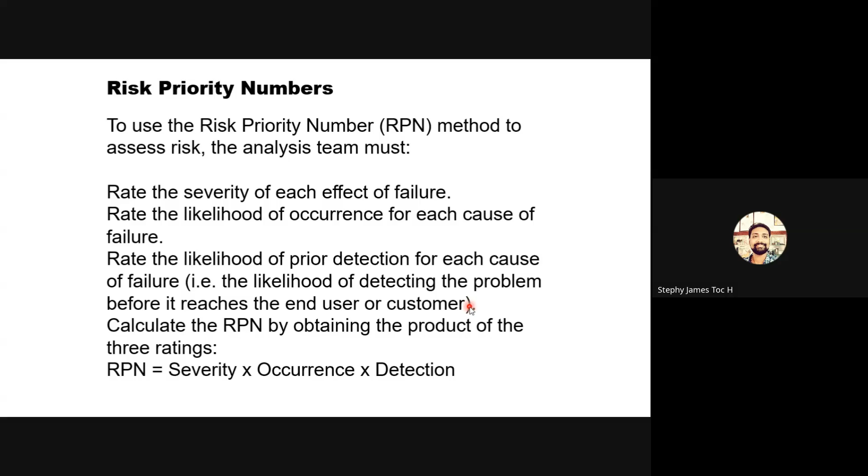Degree of non-detection means, suppose inside a car there will be a component which we are not able to detect at all - that degree of detection is high, 10. If we are easily able to detect it, then the degree of detection is less. So that is the way we can calculate.

So occurrence is like this, rank 1 to rank 10, like the severity also rank 1 to rank 10, and likewise the probability also. The RPN is calculated in this way - if RPN is less than 5, the rank is 1; if RPN is very high, the rank is 10. This is an example for calculating.

In your components also, for research purposes also, you can use this technique. This is actually for LNG, Petronet storage tank. There are various components used over there, so the component failure modes are listed here.

So here you can see the check valve leakage during recirculation - the occurrence, as the expert elicited, is 4, severity is 7, and non-detection is 3. So you multiply these three, you get 84. Like this, we can prioritize.

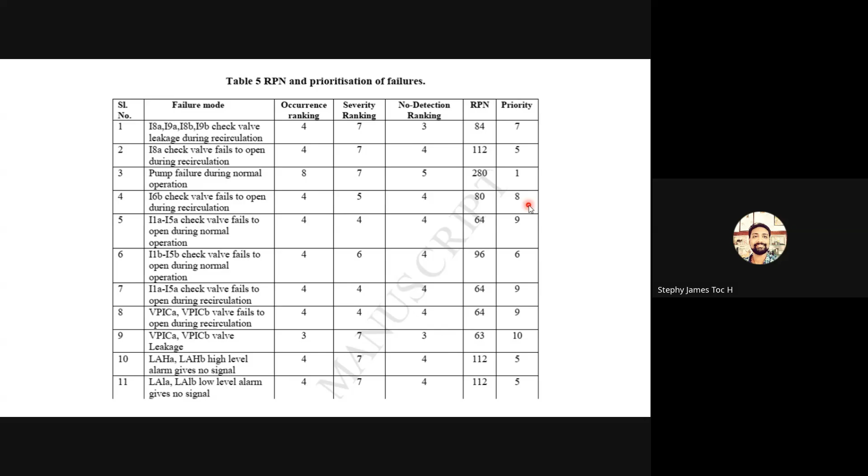Here we can see the highest priority, number 1, that is 280, which is pump failure during normal operation. This has the highest probability and highest risk value, so we prioritize this particular failure mode which can collapse the system. If suppose 10,000 or 20,000 components are there, we can prioritize which component is very critical, and give more redundancy or more reliable seal valves - more reliable components have to be used for critical operations. All that is very important for continuous operation, and the system has to be operated with very good reliability and without any failures.

And this is a software used for risk analysis.

One software is called Aloha. Aloha is actually used for modeling dispersion, fire modeling, that is jet fire, pool fire, BLEVE. All that modeling can be done by using a software called Aloha. So this is actually an Aloha result.

Using another software called Marplot, which is based on Google Earth, we can identify whether a particular area has high population density, and based on the wind direction, which direction the toxic gas goes, we can evacuate people to a safer direction using this software. That is Aloha and Marplot. We can estimate the threat zone and identify various parameters. This is how Aloha looks like.

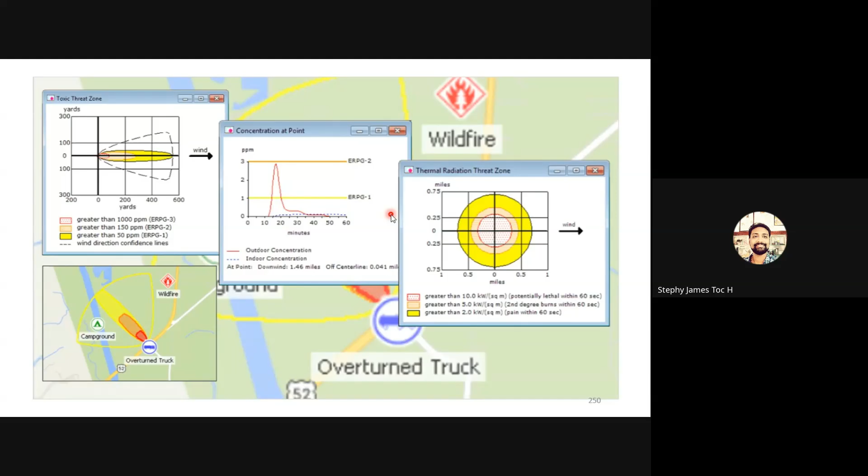So we have discussed various hazard identification and risk assessment techniques in brief - checklist, preliminary hazard analysis, what-if analysis, HAZOP, inventory analysis, and finally FMEA and FMECA, and the software called Aloha.

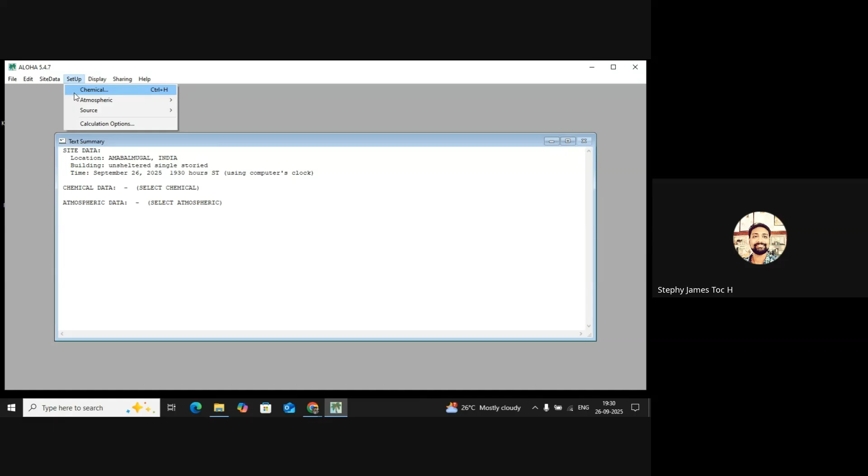Right, then what you want to do is building type - just put the same, single story. Then you go to date and time, okay. Then the main important thing is chemical. Come to the chemical - suppose I am taking a chemical like methane. You can take various chemicals, a drop-down list is there.

Suppose you take a chemical called methane, I just put methane. Methane you can put - methane is nothing but LNG, no? LNG, methane. So I select methane.

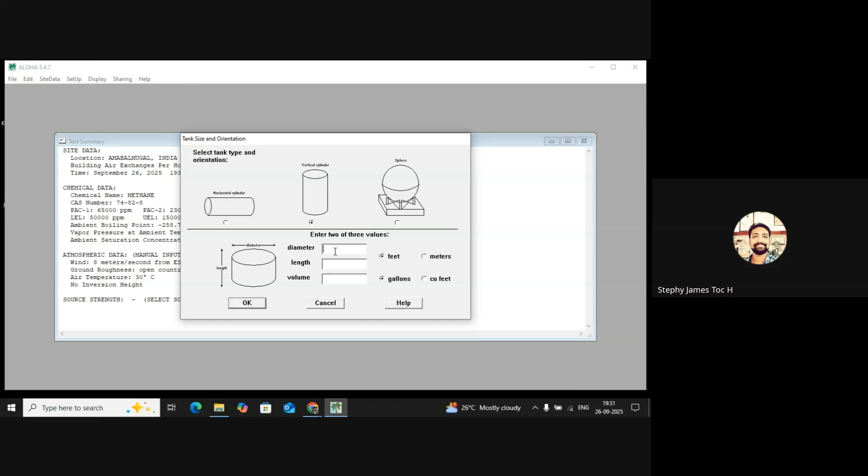And next is the source. Source, you have different sources - direct, puddle, tank. I am taking tank - tank itself we have 3 things: cylindrical, horizontal, and sphere. Cylindrical, I am taking the diameter, I am putting something around 50 meters, and the length I am putting something around 40. And you can see, the tank contains liquid at not ambient temperature.

It is kept at minus - actually, in LNG you know, minus 162.5 degrees Celsius. It is kept.

And the tank level also you can give. How much is the tank filled? The tank is filled up to maybe 86%. You can give 86%. Leaking, burns as a pool fire - okay, this you can give. Leaking tank: chemical is burning and forms an evaporating puddle, or leaking tank chemical is burning in the pool fire. All these options you can have.

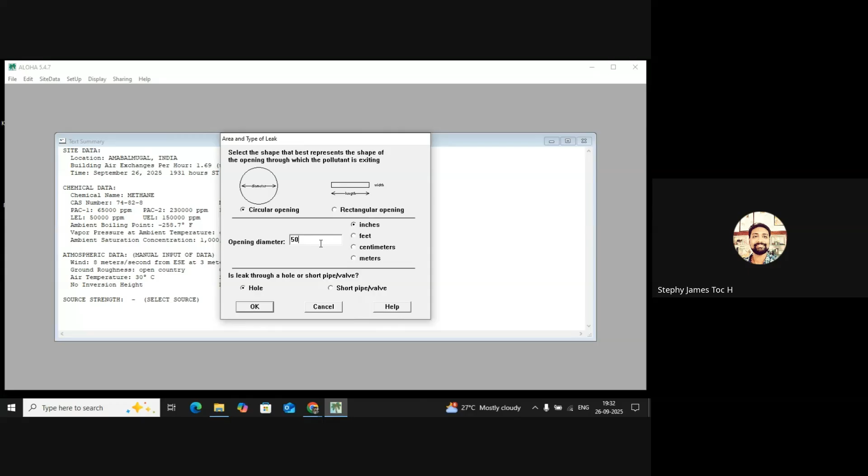First option I choose, and for the opening diameter I am putting some 50 inches hole size, a big hole. Suppose the hole - where is the hole? You can identify where the hole is. You can type it in, and all this defect.

And then now this display shows the threat zone on the toxic area. You can have a toxic area like this, so this much area is the toxic area. And also you can have the Marplot, this is the Marplot. If you open the Marplot, I'll show you how to download it. This is very simple, you can download easily, and you can have the threat zone sharing.

Marplot is here, so go to the map. You can see this is Kochi. Kochi, this is the LNG Petronet, you might know LNG Petronet. So this is the area, and you just go here and search source point. Here you see, based on the wind direction, it goes to the sea. I have given east to southeast, so it goes west, like this. If you change the wind direction, it will go to some other place.

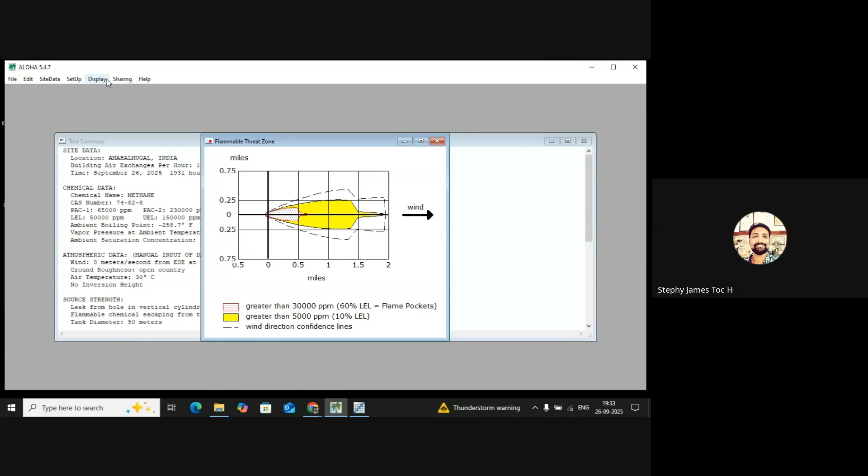So this is one, and if you select for this one, no threat zone for flammable area - you will give another flammable area, sharing Marplot. This is the flammable area, see it goes like this, flammable area. And again, you can see the blast area. That is the threat zone, blast area like this. Okay, this is the blast area.

Sharing Marplot, go to the blast area. Like this, we can have any places. See, this is actually Wellington Island, Kochi - this is Kochi only, this is Kerala only. I just put it, you can see this is Kerala, it's India only. Okay, this Marplot is just associated with Google Earth only.

So you can have any location here in India. I have selected Kochi, LNG Petronet - everybody knows about that LNG, the gas pipeline, GAIL. So this is the location I have put, you can see this is a storage tank here. So if you want to see the BPCL refinery, all the refinery storage tanks you can see - these are the various storage tanks in the refineries. Kochi refinery, this is Kochi refinery. You can have dispersion modeling for all various tanks in Kochi refinery, and various dispersion models can be used.

Yes, any other queries, please?

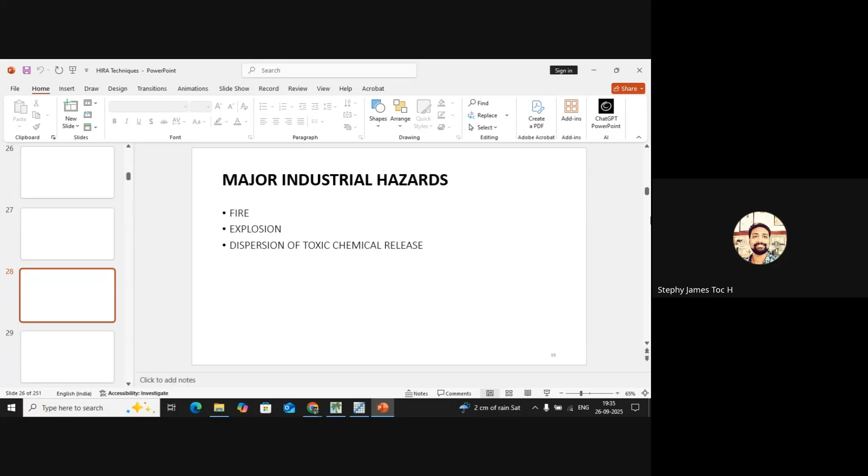Can you see? Aloha - Areal Locations Of Hazardous Atmospheres. Yes sir, this is what it stands for. Okay.

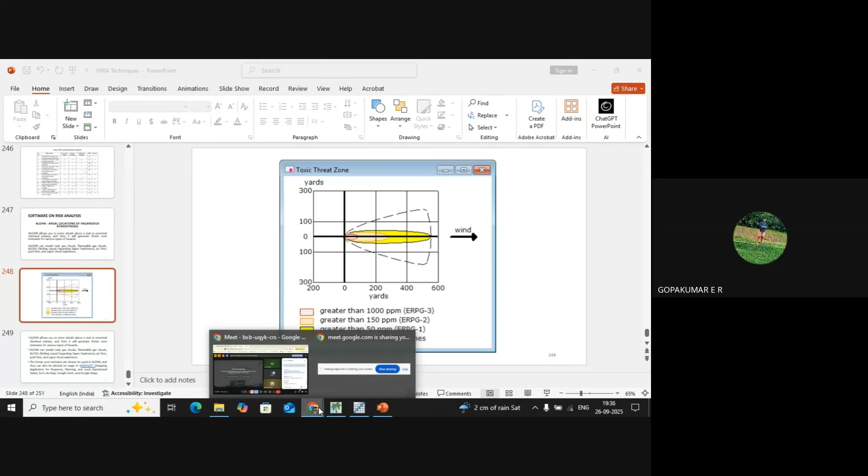Anybody? Anything else? Yes, have the previous slide please. Previous slide, previous slide. Next.

Yes, mark. Okay, it is okay sir, very easy. Okay, easy sir, thanks. It is very easy to download, sir.

Just go to Google, you can just Google and download Aloha like this. Download Aloha, it's very simple. Download Aloha, then you go to a website called this website. Okay, U.S. Environmental Protection Agency, www.epa.gov.

Then come down - download Aloha for Windows, like this. It will be downloaded like this. Now it is downloading, just 2 minutes it will be downloaded. Within 2 minutes it will be downloaded, then set up, that's it. Now it is getting downloaded.

And it is - okay sir, clear, yeah clear, very simple, nothing. Okay sir, I will contact you, yeah, for you can further contact me anytime. Okay sir, thank you. Anybody else have any other doubts?

Yes madam, please, there is no doubts please. Okay, thank you sir, yeah, for the session. The session was very interesting and interactive. Once again, thank you sir. Thank you.